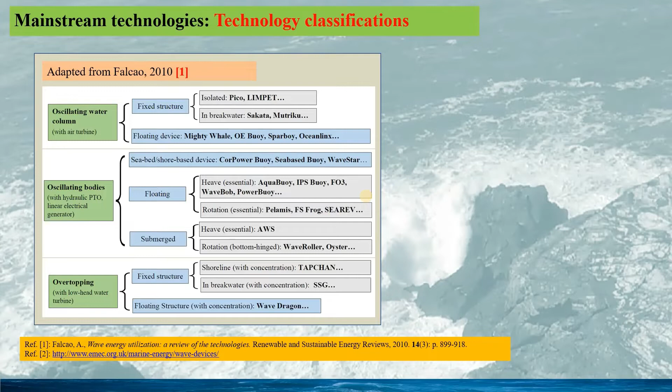This simple but rather clear classification is mainly based on the types of power takeoff systems. Principally, the main types of power takeoff system in wave energy technologies are: air turbines, hydraulic or linear electric generators, and low-head water turbines, respectively.

A different technology classification can be found on the website of the European Marine Energy Centre, mainly based on device deployment and energy conversion principles, including attenuator, point absorber, oscillating wave surge converter, oscillating water column, overtopping devices, and many other types of wave energy converters, including submerged pressure differential devices, bulge wave energy converters, rotating mass, etc. If we compare these two classifications, we can see numbers 6, 7, and 9 are not included in Falcao's classification.

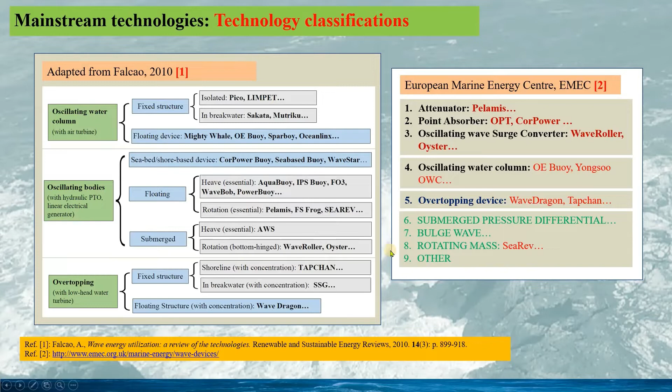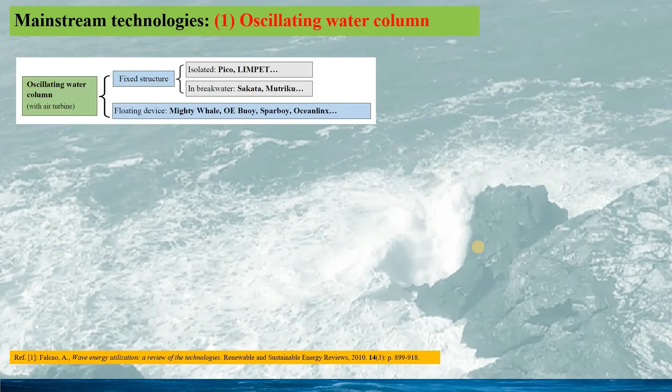In detail, an oscillating water column wave energy converter is basically a hollow structure open at both ends, to the water and to the air. Under wave action, the water surface inside the hollow structure can move up and down, which could drive or suck a high-speed airflow through the constructed air passage and the air turbine.

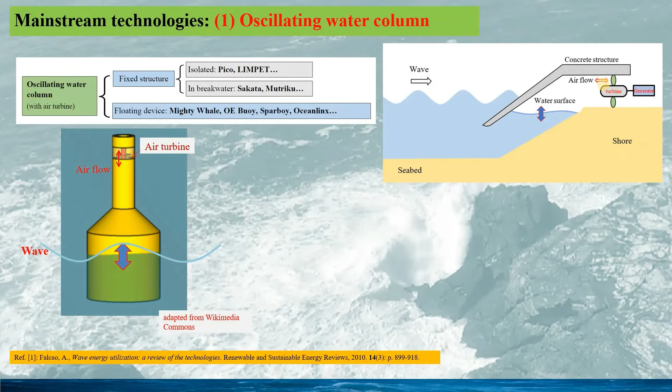OWC can be either a fixed structure, such as Limpet. It is an onshore OWC standing on the cliff and facing the incoming wave in the sea. Under wave action, the water surface in the water column would move up and down, driving airflow through the air turbine to convert wave energy into electricity.

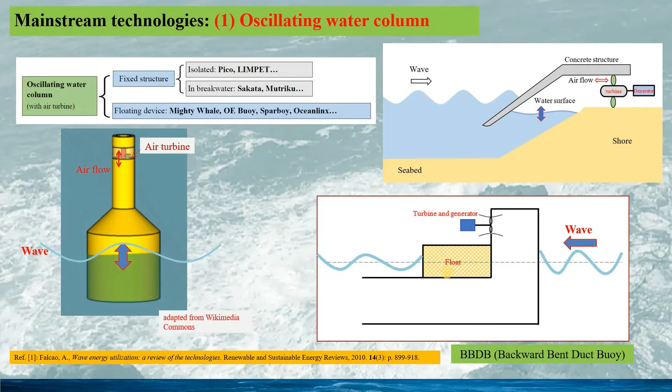OWC can also be a floating structure, such as the famous BBDB, the backward bent duct buoy, which could use the structure's pitch, heave, and surge motions, or their combinations, to convert wave energy into pneumatic energy and then to electricity.

Oscillating bodies are the largest category in the wave energy technologies. All these wave energy converters convert wave energy into mechanical energy in the primary stage of energy conversion, the first stage, and then into electricity using hydraulic or linear electrical generator power takeoffs, or into other types of energy, for instance, for desalination.

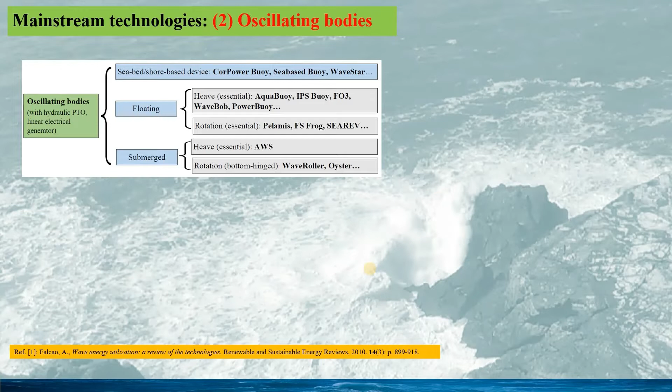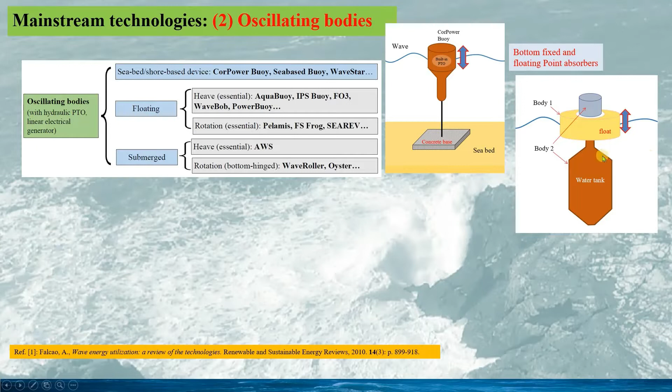Examples include bottom-standing point absorbers, such as the CorPower wave energy converter, or floating point absorbers, such as the Wavebob wave energy converter, or Ocean Power Technology (OPT).

This category also includes oscillating wave surge converters, the hinged flaps, which are fixed either on fixed foundations or on floating structures, and move oscillatingly under wave action. For converting wave energy into mechanical energy and then electricity, the developed oscillating wave surge converters include Oyster and Wave Roller.

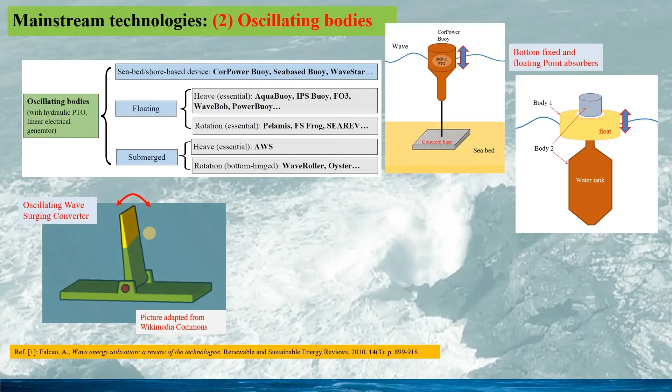The attenuator wave energy converter is basically a floating multibody device, where the relative motions between the bodies can be used to convert wave energy into mechanical energy in the primary energy conversion. The famous example is the Pelamis wave energy converter, which has 4 or 5 hinged segments for converting wave energy. See the picture here.

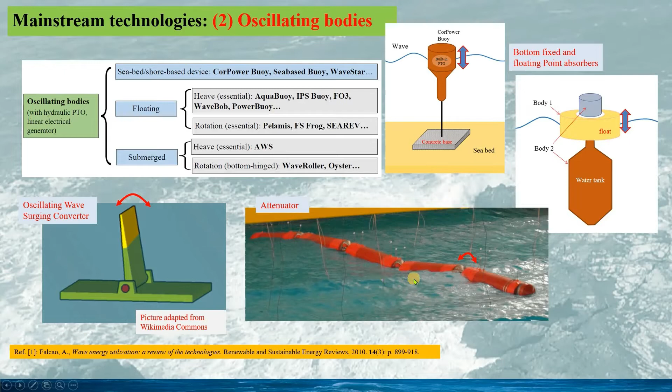The overtopping device uses wave energy concentration and wave shoaling when the wave reaches shallow water before the storage tank, and the wave jumps over the height into the reservoir. See in this plot the fixed overtopping device, and the wave jumps over the height into the reservoir.

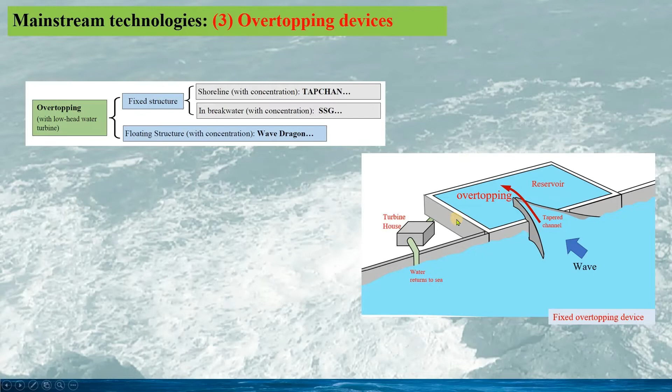The wave energy is converted into potential energy in the first energy conversion stage, and the stored potential energy can then be converted into electricity using low-head water turbines when the stored water returns back to the sea.

The overtopping device can be floating as well, with the famous overtopping device called the Wave Dragon, which is a huge floating overtopping device.

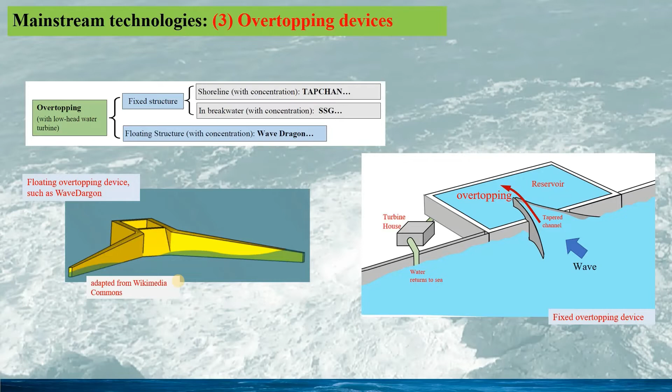For converting wave energy into useful energy, generally we have 3 different energy conversion stages, from waves to electricity. The first conversion stage is via the wave structure interaction.

The wave energy is converted into different types of energy depending on the wave energy conversion principle: to pneumatic energy in OWCs, to potential energy in the overtopping devices, and to mechanical energy for the oscillating bodies.

To further convert the converted energy into more useful mechanical energy for electricity generation, a power takeoff (PTO) system would be used: air turbines for pneumatic energy, low-head water turbines for potential energy, and hydraulic or linear electric generators for the mechanical energy.

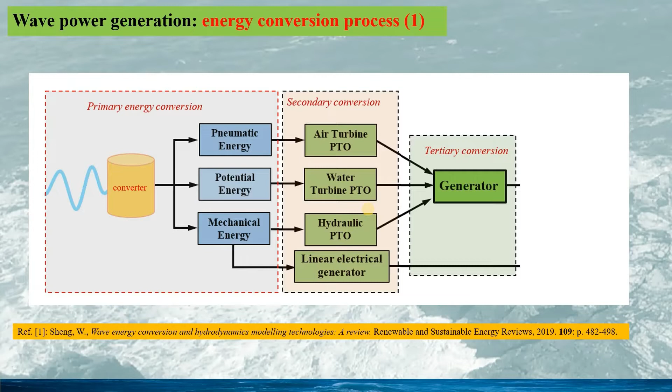The third stage of energy generation is the electricity generation by connecting the PTO to the electric generator. After that, the generated electricity can be connected to the grid through the relevant substations.

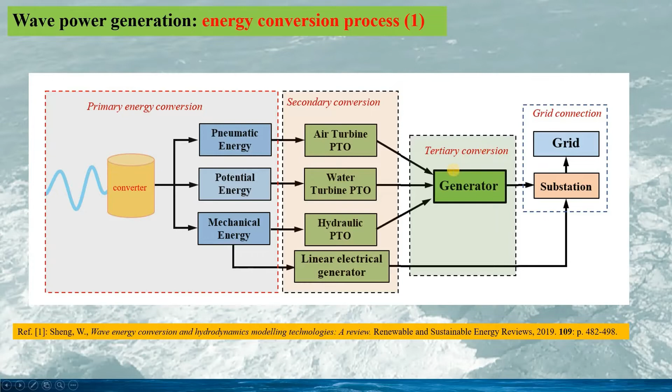Currently there are 4 different types of power takeoffs, and these are the most popular power takeoff systems. However, we should not exclude other power takeoff systems, such as specialized mechanical power takeoff systems or piezoelectric energy converters. Based on the types of converted energy in the primary energy conversion, different types of power takeoff system must be used.

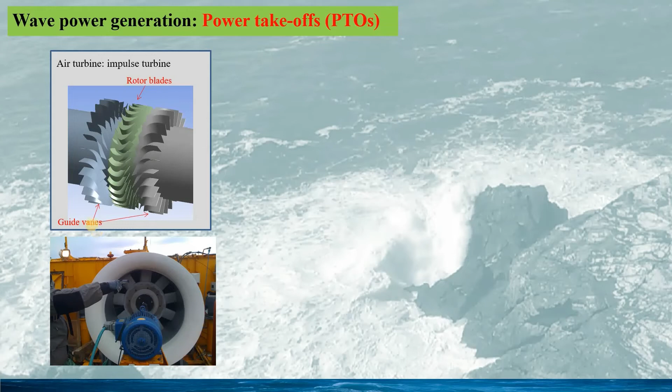For pneumatic energy, air turbines are used, including the impulse turbine, as seen in this plot, or the Wells turbine seen in this picture. For mechanical energy, a hydraulic system can be used.

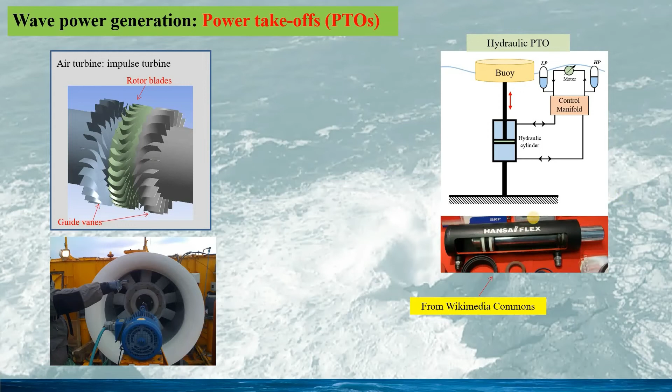See this drawing and the picture for a real hydraulic cylinder, or use the direct linear electric generator to convert the mechanical energy directly into electricity.

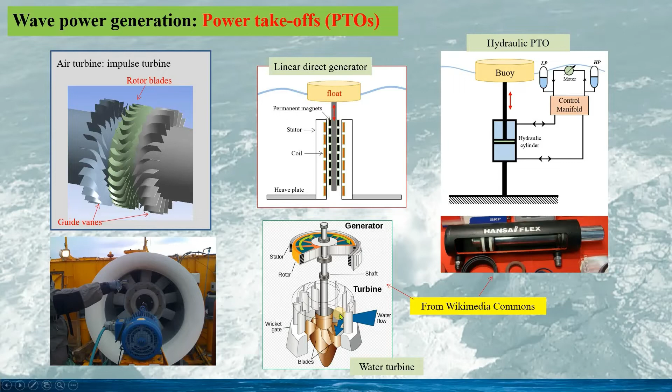See here, and for the potential energy, a low-head water turbine is employed. See the drawing, which I found from a website for free use; here it is only used for illustration, and it might be different from a real low-head water turbine.

Why are there so many different types of wave energy converters? The reason might be the different environments in the sea: different water depths, such as deep water or shallow water, different wave conditions and resources, open seas, sheltered areas, or coastal areas, etc.

Then we have the tension-leg platform in deeper waters. If we go for deeper water, we can have spar or semi-submersible platforms, and we can also have floating production, storage, and offloading systems.

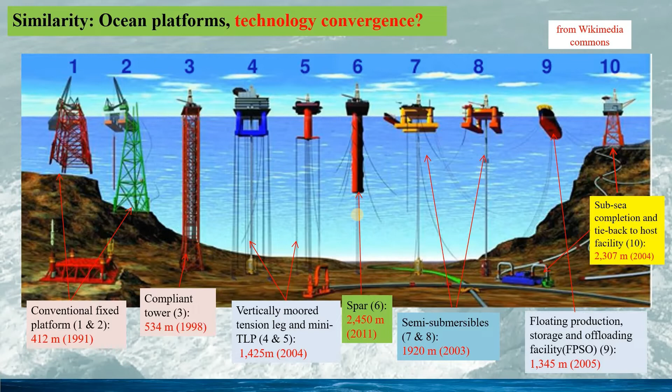In the development of wave energy technology, we have seen some successes as well as failures, and the dominant issue would be the failures of wave energy technologies in recent years.

In fact, there are some successful stories in the past, and more importantly, researchers around the world are making efforts to advance the technologies and bring green energy from the sea. Many developments are happening around the world, and I will make some introductions on this topic. In the next two slides, I would like to introduce the most successful stories in wave energy utilization and production.

The first example is the most successful wave energy utilization: the wave energy powered navigation buoy, which was invented by the Japanese inventor and pioneer Yoshio Masuda in the 1940s.

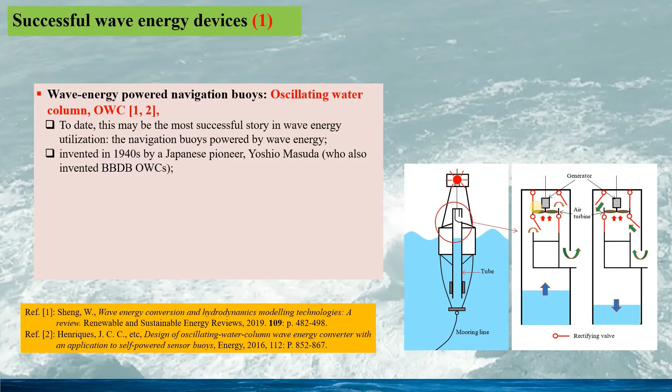The idea for the invention is to provide power for navigation buoys in remote areas, removing the requirement for replacing the batteries for the navigation buoys.

The development was in fact very successful, with 700 navigation buoys made in Japan and another 500 sold to other countries, including 20 in the US. Currently in China, a similar development is still ongoing.

Another successful story is the Limpet in Scotland. The land installed a marine power energy transmitter, a shoreline OWC wave energy converter. See the front view of the Limpet plant and the drawing illustrating the wave energy conversion principle.

The wave energy plant had been in operation from 2001 until 2013, making it the only wave energy plant to generate power to the grid from waves for more than 10 years.

Following are some facts from the reference. By 2011, the plant had run for more than 75,000 operating hours, and the plant achieved over 98% system availability during its last 4 years of operation.

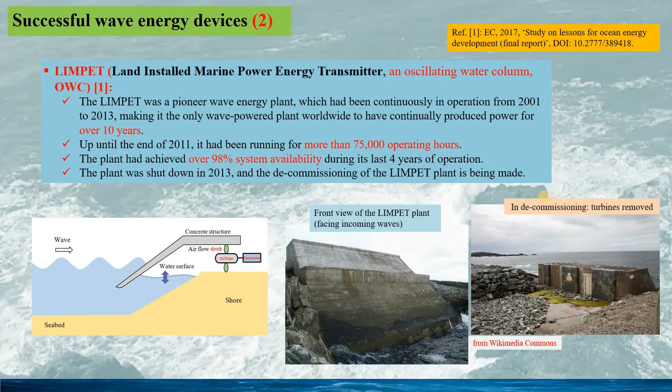The plant was shut down in 2013, unfortunately, and then decommissioning was carried out. This is the picture of the Limpet plant after the turbines have been removed.

The main reason for shutting down the wave plant was economic consideration. The power generation from waves is too expensive to make it economically viable. It should be noted this is the reality for all wave energy technologies, even if all other technology issues are solved, for instance, the reliability and availability of the wave energy production.

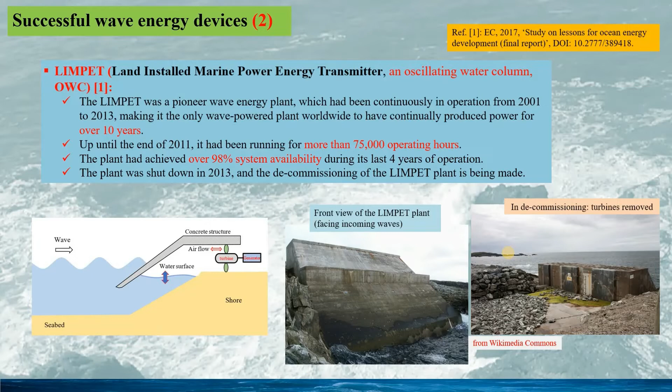Hence, we can see there is a catch here. How can we prove our technology and make the reduction of the energy cost in a lengthy and costly process, while the financial support asks for a return in a short period?

In the next 3 slides, I will introduce some promising technologies for wave energy conversion and production. All these technologies are at high technology readiness levels or in real sea trials.

The first example is the OE-Buoy, the floating oscillating water column wave energy converter, which is a backward bend duct buoy that uses the structure motion, pitch, heave, and surge for wave energy extraction.

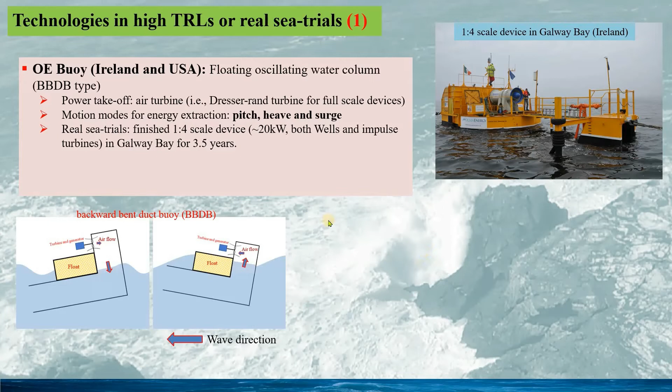The development of the OE-Buoy technology has gone through real sea trials for the quarter-scale model, and both Wells and impulse turbines were tested during the test period for over 3.5 years.

Currently, a full-scale OE-35 with a capacity of 500 kW was built and towed to the wave energy test site in Hawaii, US, and the planned sea trial would last a year. You can find more details on the website, the link here.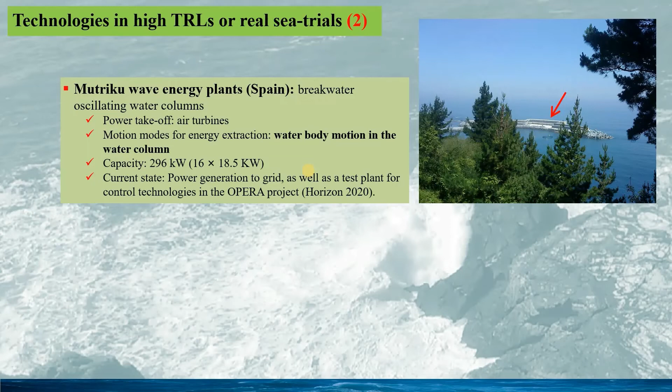There are 16 OWCs, each equipped with a power generation of 18.5 kW. Hence the plant totals 296 kW. This plant is currently generating power to the grid, and it has been used as a test plant for control technologies in the OPERA project and EU Horizon 2020 project.

Another wave energy generating OWC is the Yongsoo Wave Energy Plant in South Korea, which is an isolated bottom-standing OWC with an installed power capacity of 500 kW.

The author understands that this wave energy device is generating power to the grid, but not much information can be found for this wave energy converter from the website, and some details can only be found in the reference here.

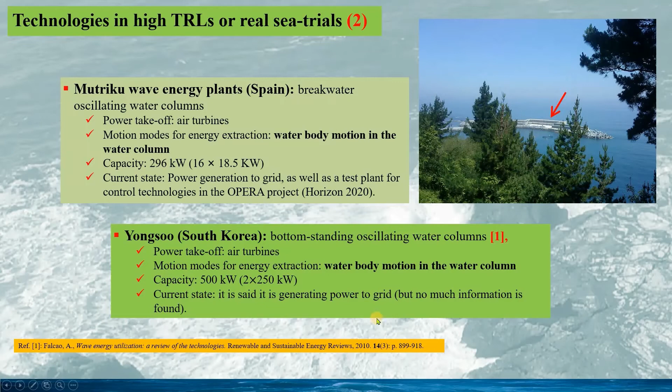In this slide, 2 different point absorbers will be introduced. The first one is OPT, the Ocean Power Technologies, US, which has been in technology development for many years, and from their website, it can be seen that the PB3 buoys have been generating power, but with only a capacity of 3 kW.

Currently, not much information is reported or available from their website.

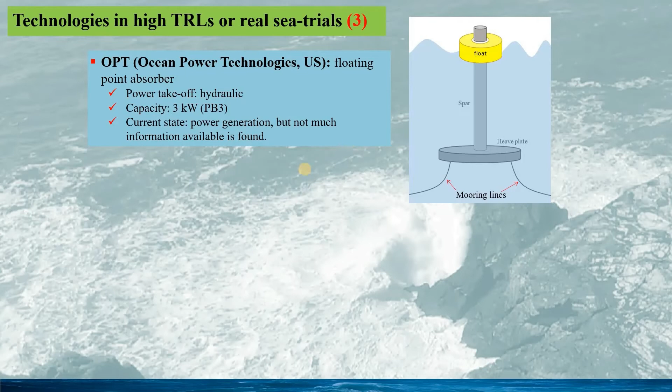The second point absorber is the CorPower Buoy, which is a bottom-referenced point absorber. CorPower is a relatively new technology, but the advancements of the technology have been great, and recently, the half-scale model has been tested in the European Marine Energy Centre in Scotland. The author has been hoping more information can be available for this wave energy converter.

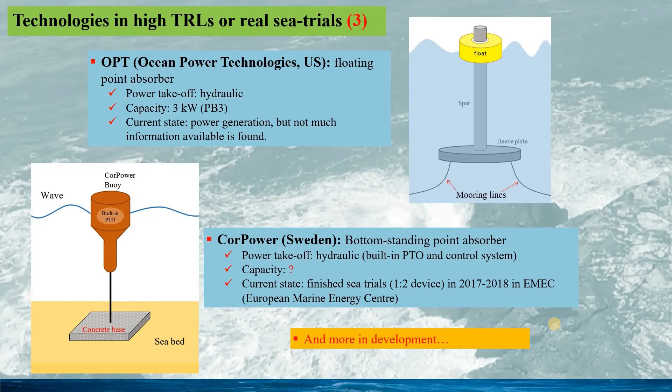In addition, there are many other developments in wave energy technologies, including the Eagle device in China, CETO in Australia, and etc.

In the next two slides, I will introduce the failures of the technology, especially the failures since 2013. Most of the failures are technological failures, but also some operational failures. The author hopes we can learn something from all these failures, although it would be difficult, since no report on the root cause of the failures has been made.

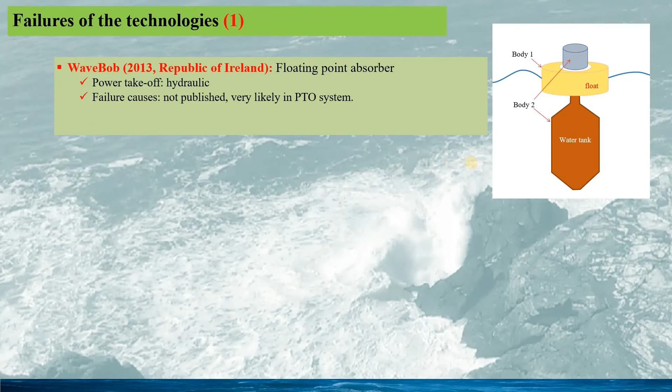The first failure introduced here is the Wave-Bob device in Ireland. Wave-Bob is a floating point absorber. See the drawing. The original power takeoff is the hydraulic system, and the reason for failure is not published, but the author reckons it is the PTO system. This might be understood from the fact Wave-Bob had a plan to change the PTO from hydraulic system to direct linear electrical generator shortly before the company went into administration.

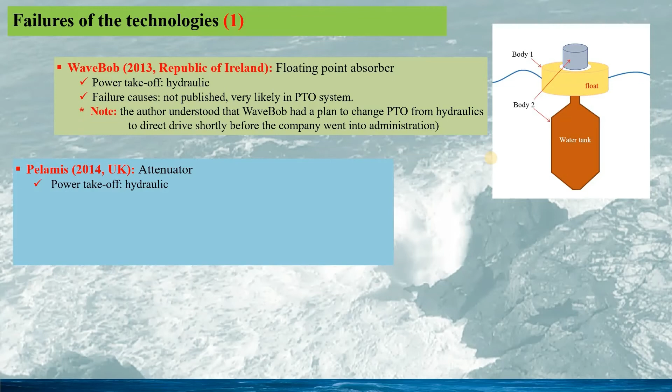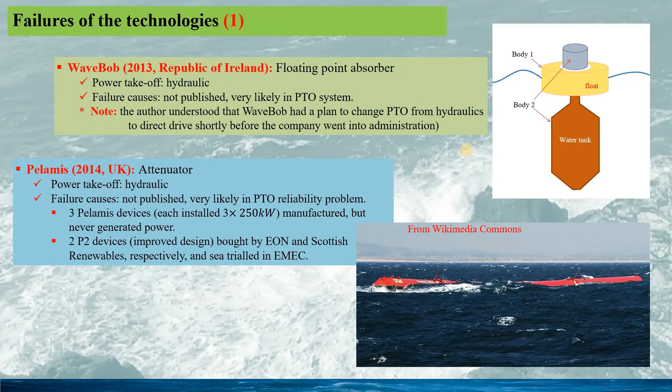The second example is the Pelamis, an attenuator wave energy converter, which was once the most advanced wave energy technology. In development, three original Pelamis devices were constructed, but never actually generated power. Then two newer P2 devices were constructed and bought by E.ON and Scottish Renewables respectively, for extensive sea trial at EMEC from 2010 to 2014. The reason for the failure was not published, but again the author reckons it is with the PTO system.

Here I would like to show some facts about the P2 sea trial. The sea trial covers a period from 2010 to 2014 for two machines. They generated power for about 12,000 hours, and the generated power is about 250 megawatt hours to the grid. Based on these figures, we can calculate the average power generation at about 20.8 kilowatts. If we compare this to the capacity of the machine, 750 kilowatts, the power generation is actually less than 3% of the capacity.

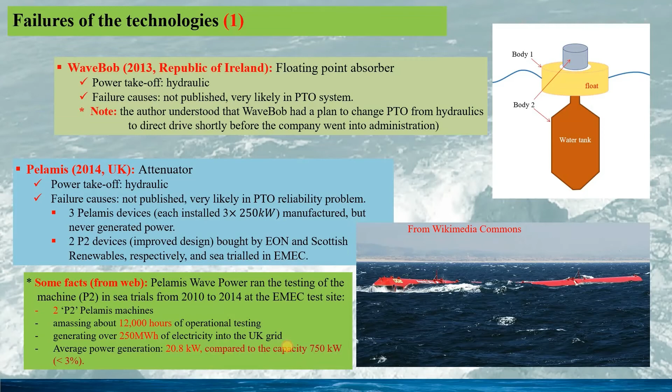The third example is the Aquamarine Oyster, the oscillating wave surge converter. The device uses an oscillating flap for extracting wave energy. The power takeoff is a hydraulic system, and the reason for the failure was not published, but it is reported the failure was triggered by a mistaken operation on a valve. The root cause might be the hydraulic PTO system, since the author understood Aquamarine had a plan to change the power generation from onshore with the pumping system to the device, so the PTO would be within the device shortly before the company went into administration.

The fourth example is Oceanlinx, the oscillating water column wave energy converter. In fact, there were two failures in the development. The first failure was due to mooring failure for a floating OWC, and the device broke away and sank onto the seabed. The second failure was an accident of the seabed-standing OWC during its towage from the building site to the deployment site, where the airbag for floating the OWC broke, and the device sank onto the seabed. You can find the photos if you search Oceanlinx. Now the technology, the IP, brand, and trademark were all sold to Wave Power Renewables Limited in Hong Kong for further development of the technology.

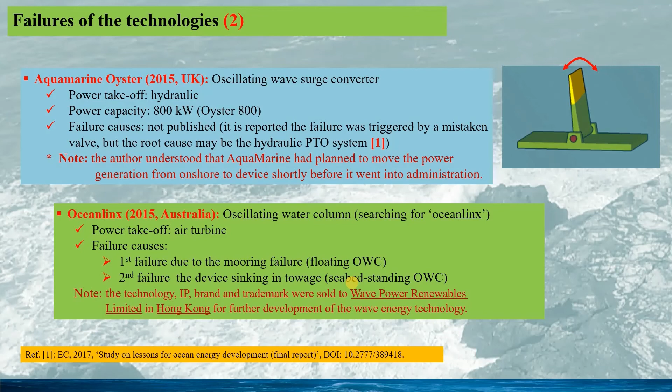In this slide, the challenges for wave energy technologies are given. All wave energy converters must experience severe irregularities in wave amplitude, frequencies, and directions. Thus, designing a device which can extract wave energy efficiently in a wide range of wave conditions would be very difficult. All wave energy converters would have survival problems in extreme weather conditions, which might mean a possible 100 times larger loading than that of the operational loading.

A common difficulty for wave energy converters is their large force and low speed due to the wave. Thus, how to improve device reliability and energy conversion efficiency would be the key factors. Most wave energy converters need to convert the slow motion of the wave, about 0.1 Hz, to the regular energy supply of 50 or 60 Hz, a frequency 500 times larger. End-stop is a common problem for most WECs due to the inherent limited stroke of the PTO, but it might cause significant loading on the PTO, making the PTO less reliable. We also have many difficulties in engineering implementation.

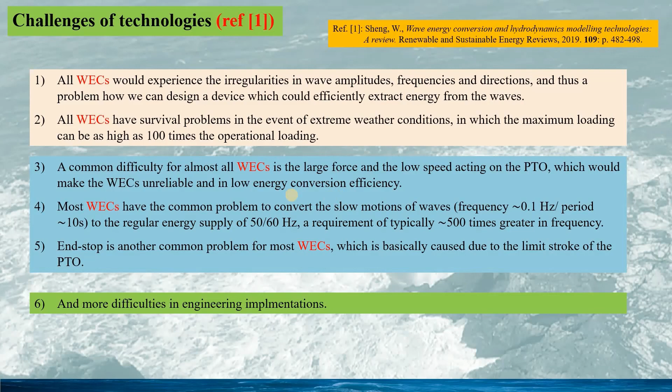Here I would like to talk about my personal opinions on wave energy technologies, which are purely based on my personal understanding and experience.

The author believes that difficulties number 3 to number 5 in the previous slide could be principally conquered by using oscillating water columns. The advantage of the oscillating water column is that wave power can be converted into high-speed airflow directly. Thus, a much smaller force would act on the OWC PTO, which is very beneficial for PTO reliability and survivability. There are no joints or articulations on OWC wave energy converters.

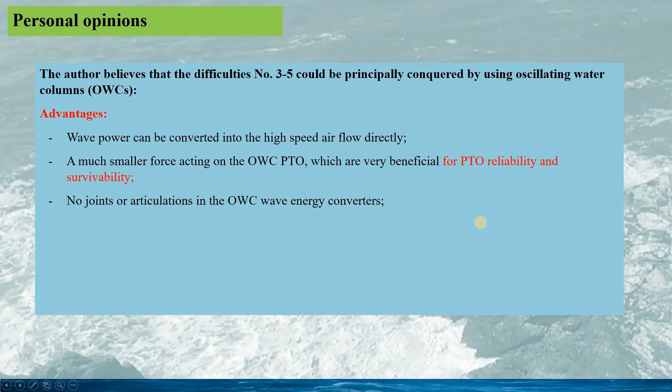The disadvantage of the oscillating water column wave energy converter is the efficiency of the air turbine, since self-rectifying air turbines are generally very inefficient. But great advances have been and are being made at IST in Portugal and in Switzerland and the US to improve the energy conversion efficiency for air turbines.